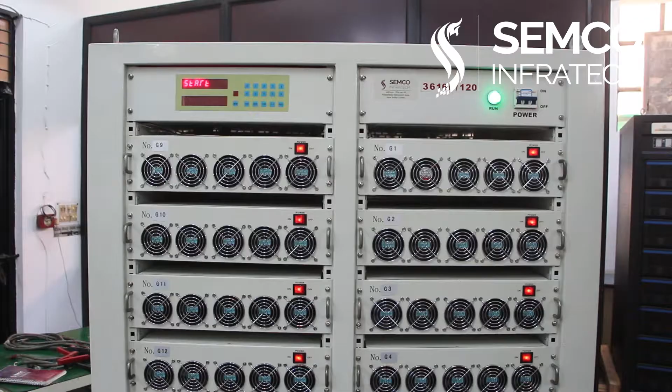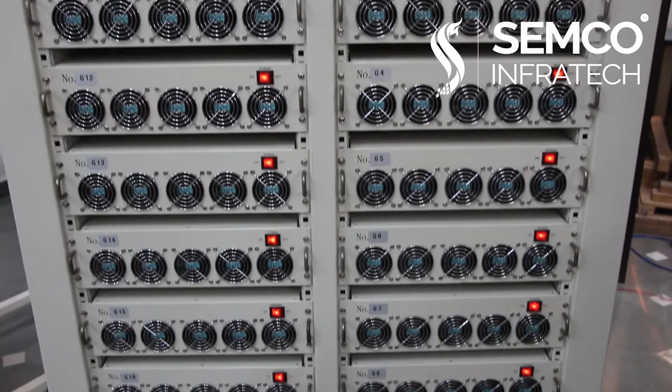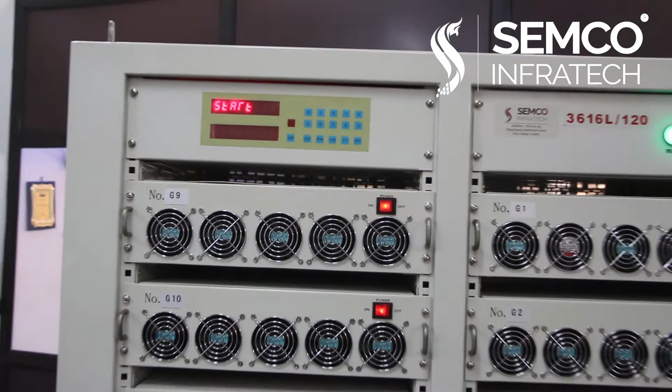Today I am going to show you the connection and operation of the SICT 5V 60A 32 channel cell testing device. This cell tester is used for testing and capacity grading of prismatic type cells. This machine requires 3-phase connections and the voltage range is 390 to 415 volts. Power consumption is 12.8 kilowatts.

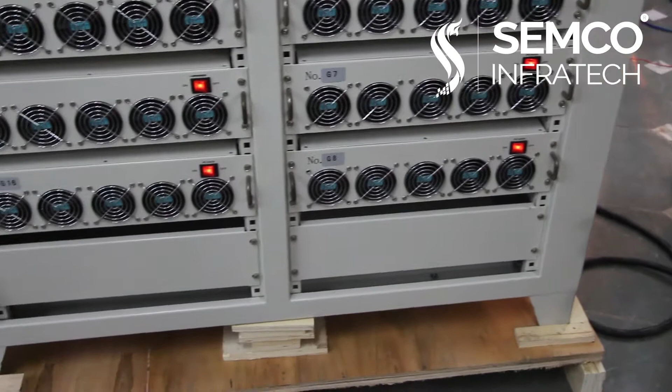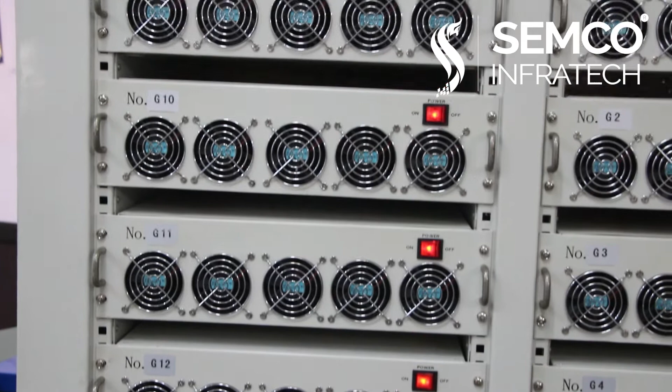In this cell tester, individual channels can be programmed and tested for both R&D and production purposes. Why should we use this device? After purchasing new cells, we need to check the charging and discharging characteristics and capacity for making a proper good battery pack. You can also do capacity sorting with this device. So we choose this cell testing machine for prismatic type cell testing, capacity grading and characteristic checking.

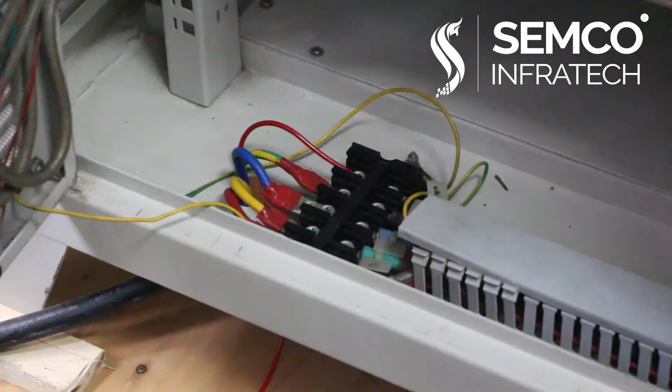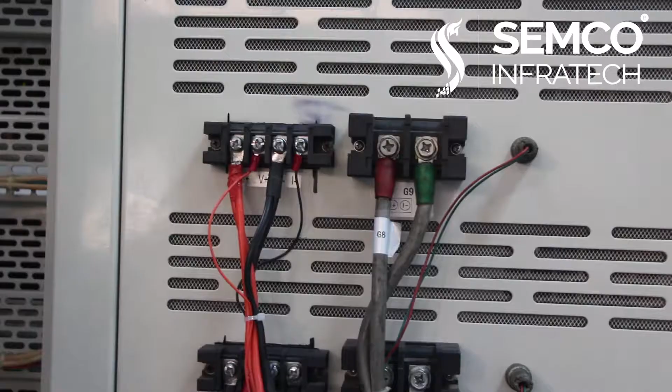This is the input supply for the machine. The 3-phase supply is connected, RYB and neutral are connected, and earthing is also connected. Here the charging and discharging cables for the cells are connected. Here you can see 4 cells are connected for charging and discharging, and this is the V sensing wire. It has 2 types of connection: this simple one for wire connection, and this one for cable type. You can connect with different cells.

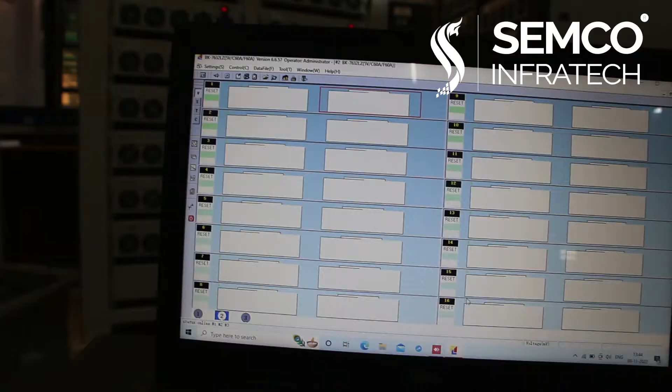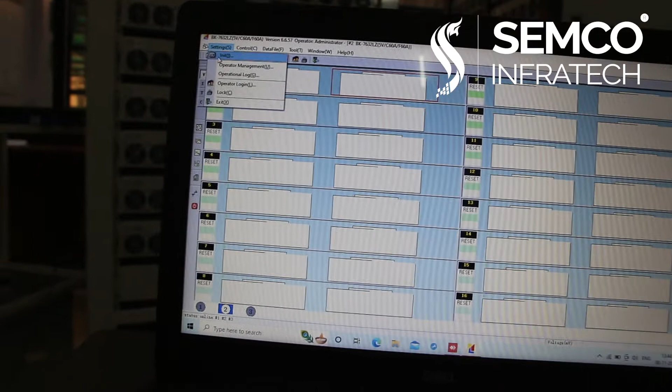Here you can see the interface for this machine's software. Here you can see 16 boxes with each box having 2 channels. Total 32 channels are visible. For programming, first, to initialize communication, you have to go to settings, initial, and here you have to select the machine code, and for communication you have to select which COM port is connected.

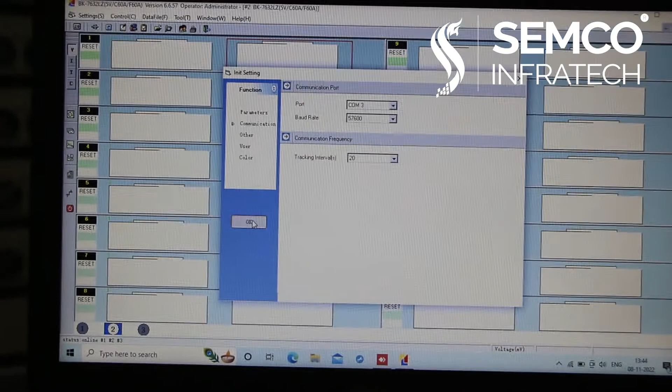For COM port communication you have to connect this RS485 communication cable. The RS485 communication cable USB converter is required for communication, and here it is connected in COM3, so the communication is online at COM3. After that you have to go to the control panel for programming.

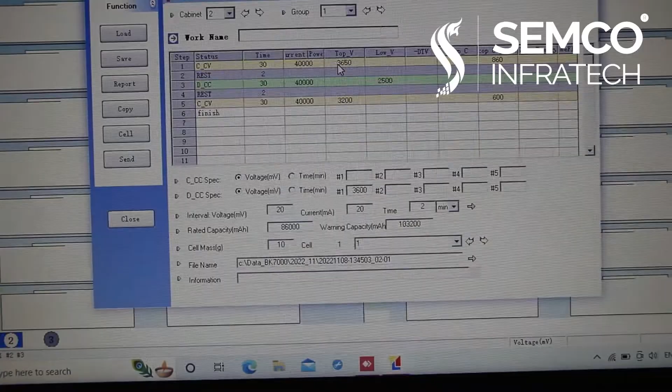Here you can see the program is given for CC and CV mode charging at 40 amperes up to 3.65 volts, the high cutoff for prismatic cells, then rest for 2 minutes, and again discharging at constant current of 40 amperes down to 2.5 volts, which is the lower cutoff of the prismatic cell. This type of program you can give, and for running the program you have to click on send. After sending you will start the program.

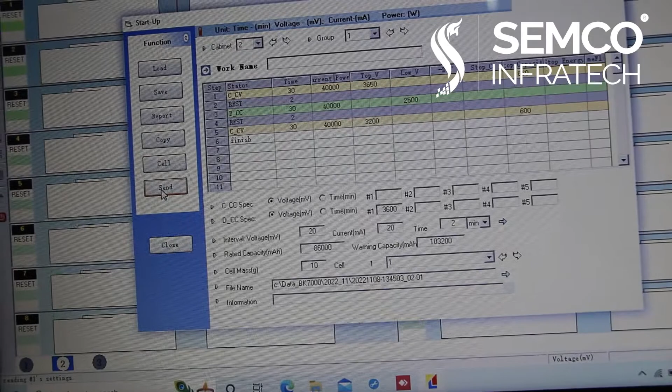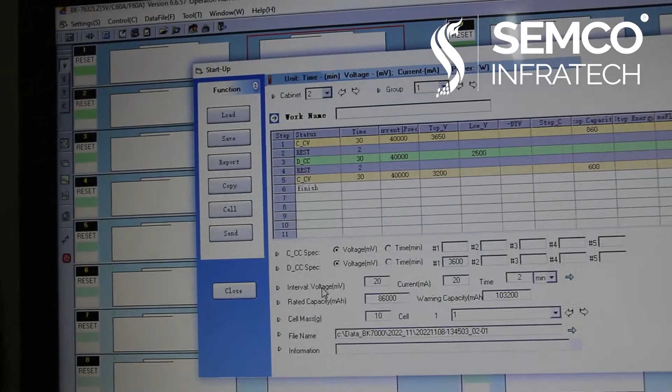After sending, we have to select which box number is connected to the cells. Here in our machine, channel numbers 9 and 10 are connected to the cells. So we will select 9 and 10 and click OK to start. So here you can see 3 channels are connected and working properly.

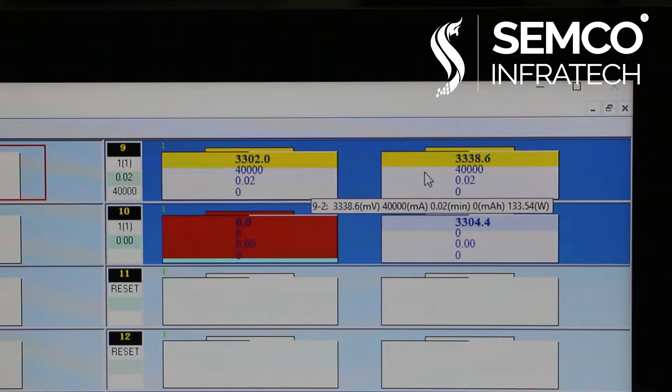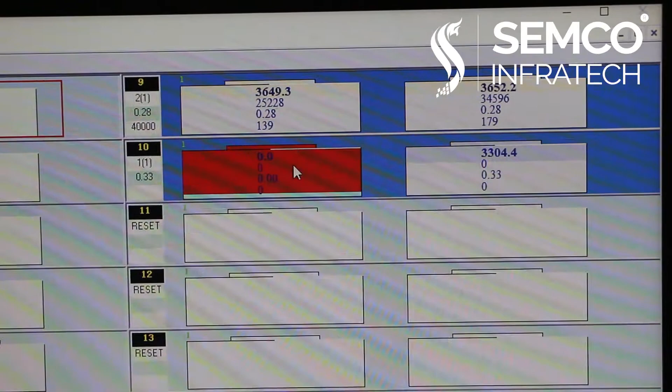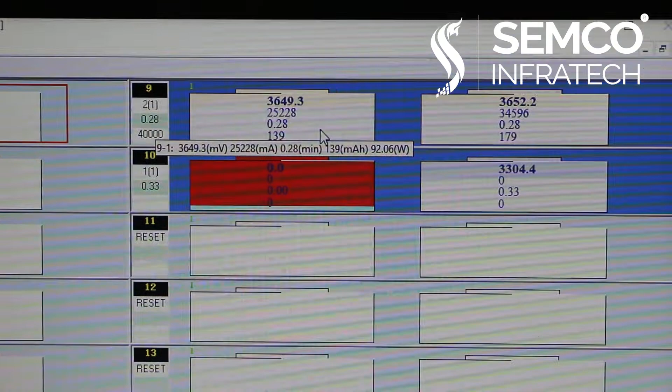Here channel numbers 9-1 and 9-2 are currently working properly, as 40 amperes is flowing and the voltage is increasing. And in channel number 10, here you can see the error. If there is an error, the channel will show like this in red color, indicating that there is some error. Now these cells are shifted to rest mode, and after running for some time, by clicking on it, you can see the graph also.

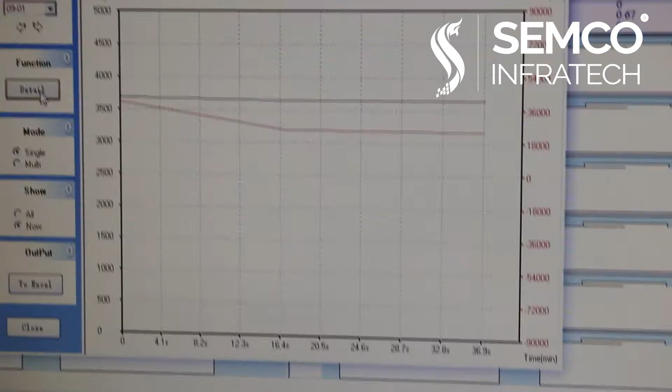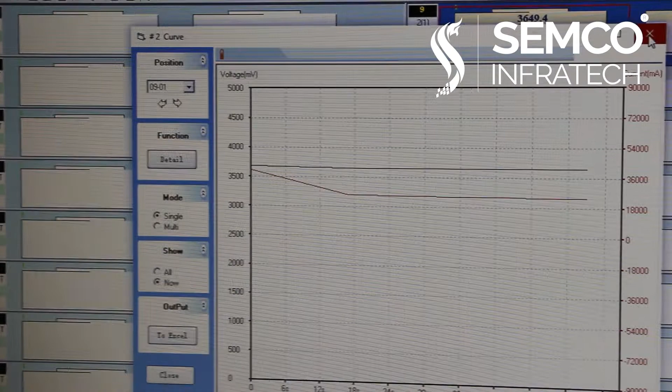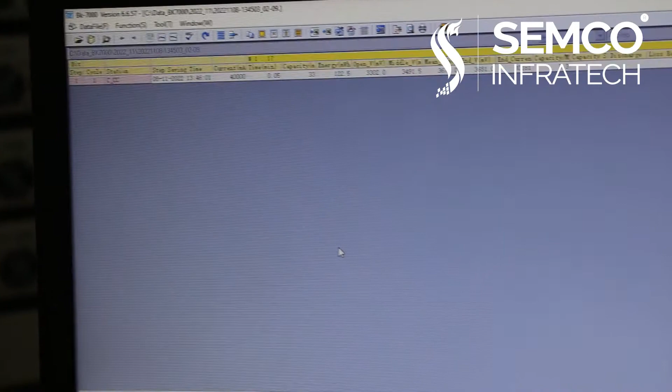Here you can see the voltage graph and current graph, and for per-second data you click on details and you can find each second's data. For taking the export file, you can click here on data file and open the file. According to the channel number and testing date you will find the data; click on it and open, and here the data will be visible, and from here you can export the data to an Excel file.

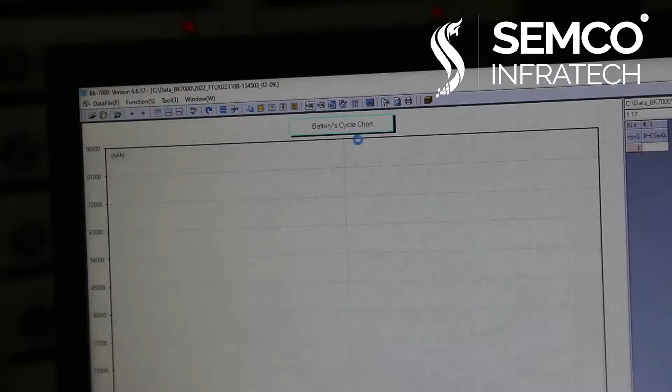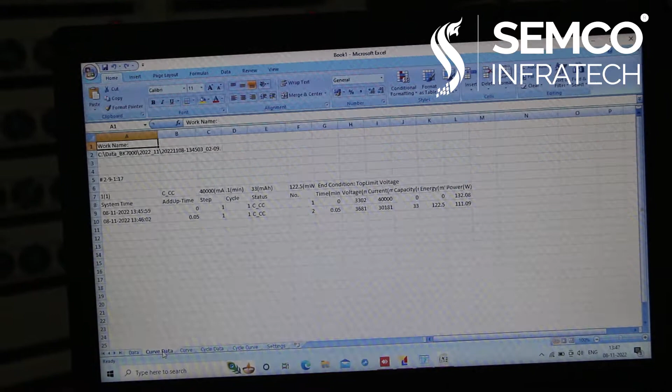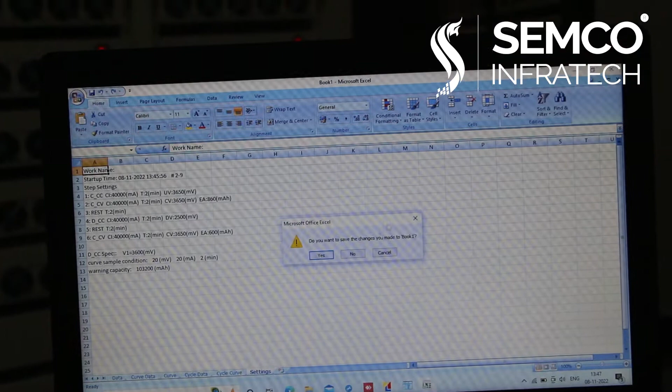You can see the Excel file data is created with all the stage data, curve, cycle data; everything is visible in this Excel data. So this is all about the software operation of this machine.

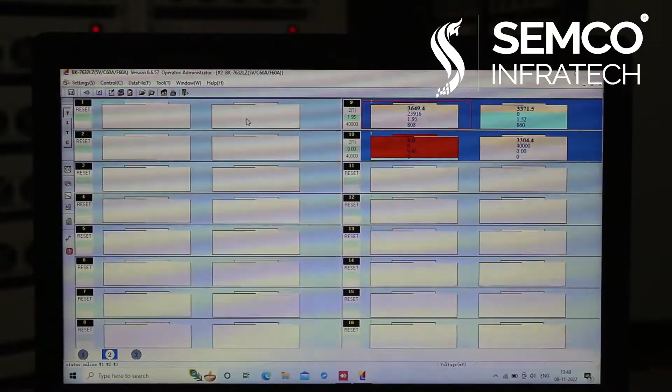With this machine, certain issues arise, such as communication and software compatibility, data errors, and voltage related problems. In communication issues, normally the RS485 communication cable is removed or the IP address needs to be set properly. Compatibility issues arise when the antivirus or Windows firewall is active. For this issue, we need to turn off the antivirus or firewall. Then this issue is resolved.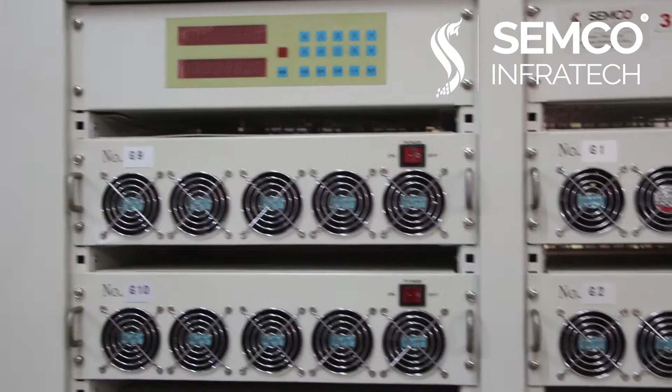For data related issues, we have to set the data path, because sometimes the data path is changed automatically or might have been improperly set. For that reason the data issue arises. So you have to select a proper data file path and then run the program.

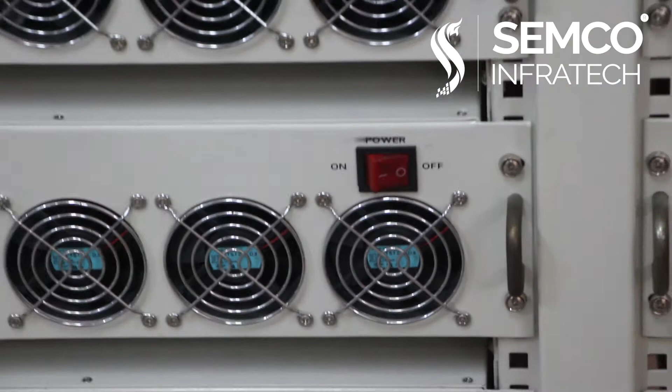Voltage related issues arise when the input voltage is more than the recommended input voltage, which is 390 to 415 volts. If it increases above that voltage, then voltage related issues arise, such as the PCB or SMPS might get damaged. This is all about this machine, the SICT 5V 60A 32 channel cell tester.